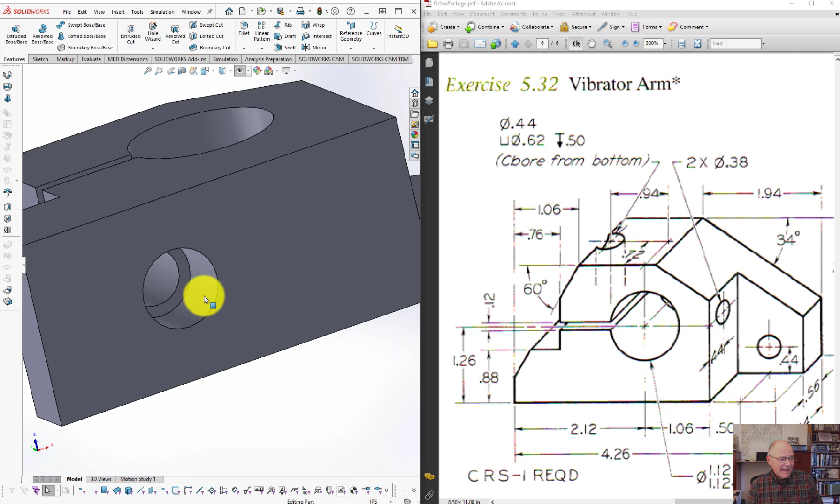Counterbore is a pocket. The depth of the pocket's the distance from that surface to this surface. That's 0.5 inches because it tells me that right there with that depth symbol. The diameter of that hole is 0.62. The diameter of that hole is 0.44. Now that's what it looks like isometrically.

That hole, the big hole, goes all the way through. You can see that. That slit goes all the way through. Something's going to be bolted on here and that'll be clamped to something. Otherwise it's a fairly straightforward shape. I'll just rotate it around so you can see it from all sides. I'm purposely not rotating it into the traditional orthographic position because I want you to do that yourself.

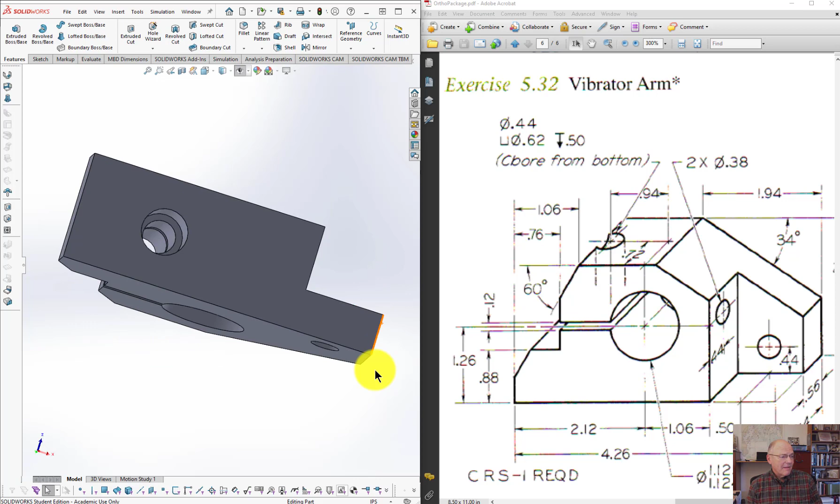But there's what it looks like from the bottom. Looks like from the other side. You can see that hole going down through. And then the counterbore on the bottom. That's what it looks like. A couple other things here. On places where you have 2 numbers, right here you have 1.125, 1.124.

That's a specific tolerance, and tolerance means the size of that hole must fall between those 2 numbers in order for this part to work. You can tolerate that much variation without changing the function of the part. The other dimensions have 2 decimal places, and their precision would be placed in the title block, and it would be based on how many decimal places they have in the United States. That's not something that can be used in other countries.

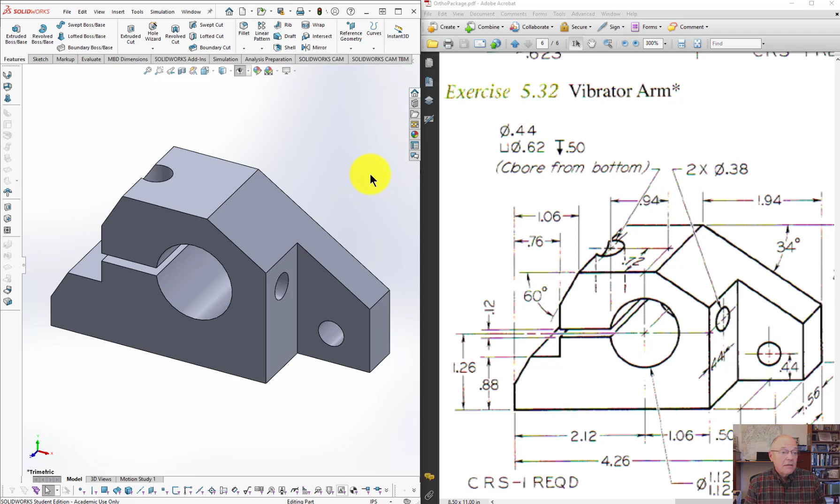The ASME standard permits tolerance information to be carried by the precision of the dimensions placed. Metric drawings in the ISO, the International Standards Organization, do not. So that's this one. Now let's look at the hinge block. A hinge block has a number of dimensions as well that are tolerance dimensions.

There's also another counterbore here, 10 millimeter hole. Counterbore is 14 millimeters. There should be a diameter symbol here. I took these from one of the Giesecke textbooks, and these were edited after the fact. Mr. Giesecke drew most of these probably close to 80 years ago. At any rate, someone just left out the diameter symbol that would normally go right there.

You have a few other abbreviations. Cold rolled steel is what CRS stands for. And then you don't really need to worry about this for the drawing itself. You're going to draw this with multiple views and then put the dimensions on it. And when you do sketch this, you can just sketch it because you're going to be doing this as sketching. Just sketch those sizes somewhere close to whatever that tolerance dimension is.

If you're using AutoCAD, and some of you might be using AutoCAD, then you're going to do what's called max material condition. In a situation like this where you're creating a void, you're going to take the smaller of the 2 numbers. Down here where there's a hole also creates a void, smaller of the 2 numbers. Any place that actually has material associated with it, and there are no dimensions like that here. So in each of these cases you'd use the smaller of the 2 numbers.

I also want to point out that in SolidWorks, any place where there's a tangent edge, where that surface meets this surface through a tangency, because it's a computer and it sees that as a surface and that as a surface, it always puts a line between them. But in fact, with the eye, we would not see that line. It would look more like this.

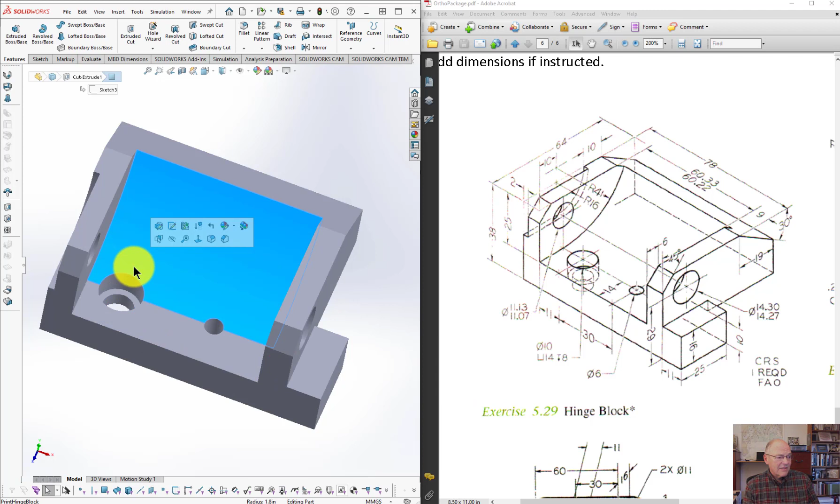That surface right here would be the smaller 10, and the depth from that surface to this surface, well, probably makes more sense to call it from that surface to this surface, because it would have to go from that flat surface. That depth is going to be 8, and the depth in this case is given as a minimal depth. So the fact that it's deeper over here because that arc starts to go up doesn't matter. You're still going to measure it from that end right there.

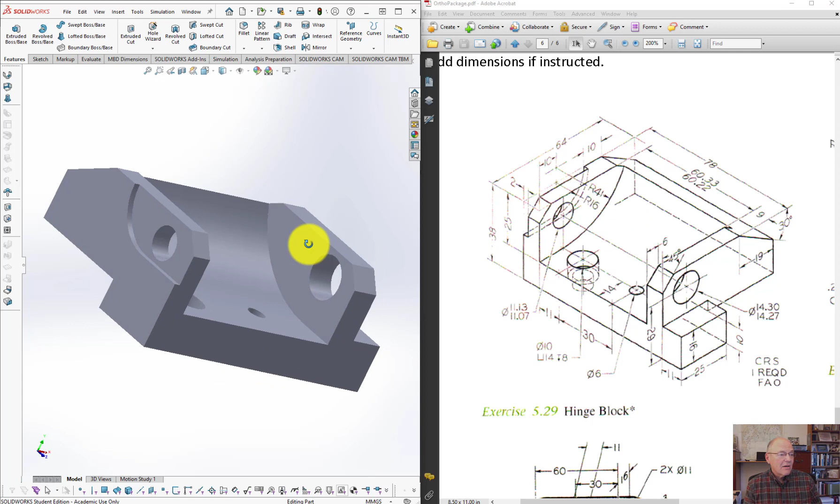The bottom shows you the holes go all the way through. Got a couple holes in the side as well. Now that little cutout is represented over here with that hidden line. That little cutout is just a relief. I'm not sure exactly what it would be for on this particular part, but it's there, and the radius of that is given right there as a radius of 16. The radius of the big arc is a radius of 41. That's the radius of this right there.

Now I'm going to go back to showing the edges, just a little easier to see what we're talking about here. So I'm going to rotate this around like I did the other one, so that you can see what it looks like, and of course you can stop this video and go back and forth. The reason I'm doing this is I want you to be able to visualize this and then determine how to best represent it orthographically by doing the sketching.

Go this way, and it looks like that. Isometrically, looks like that. More or less like this. These are both isometric drawings. It's not exactly the same angle on this, but you can see how it's portrayed. A little difficult in isometric drawing sometimes to understand what's going on.

For instance, right here there's a hole. It doesn't tell you it goes through the part directly, but it does go through the part, and the way it does tell you that is by not giving it depth down here. So that diameter of 6, when applied to a hole, indicates that it goes all the way through the part, because if it didn't, you'd have to indicate a depth. Counterbore we just looked at. Everything else I think is pretty clear. We're going to move on to the next one.

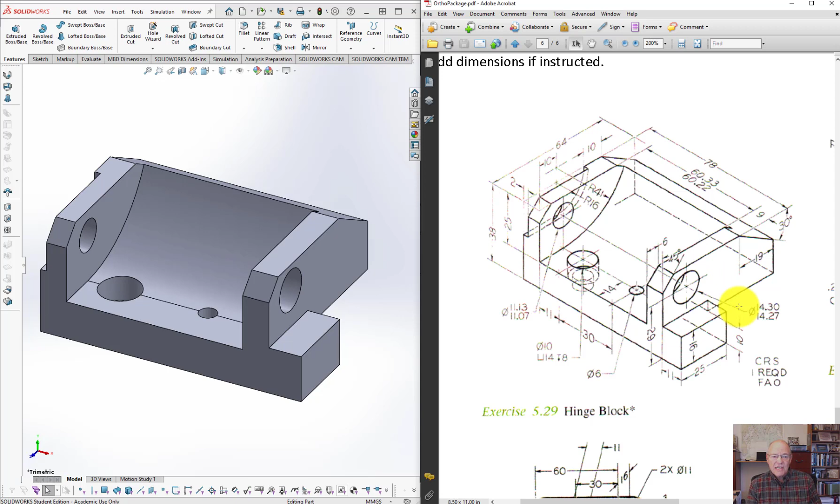And before we go on to the next one, I did not tell you what FAO stands for, and that's something you don't see on prints very often anymore. It stands for Finish All Over, and it implies that it might be possible to think you didn't have to machine this to make everything smooth, when in fact it has to all be machined. So that either was a forging or a casting, probably a forging, that must now be machined in order to achieve the dimensions given. Now we'll change to the next one.

The next piece we're going to look at is called a vibrator arm. You can see that it was drawn isometrically a little differently than this one. We could kind of put it in that position if we wanted to. This has another feature that we haven't seen yet, which is a chamfer, although it doesn't have the whole word here, C-H-A-M-F-E-R. The chamfer is going to be a dimension by an angle.

And if we take a look at this model over here, the dimension given is the distance from this face down to that edge right there. So that distance would be like we're drawing a right triangle in here. We draw the right triangle, the distance from here is going to be 0.25, and the distance from here back is going to be 0.25. And that means I'm drawing this on the surface, but the fact is that's the part that gets taken away.

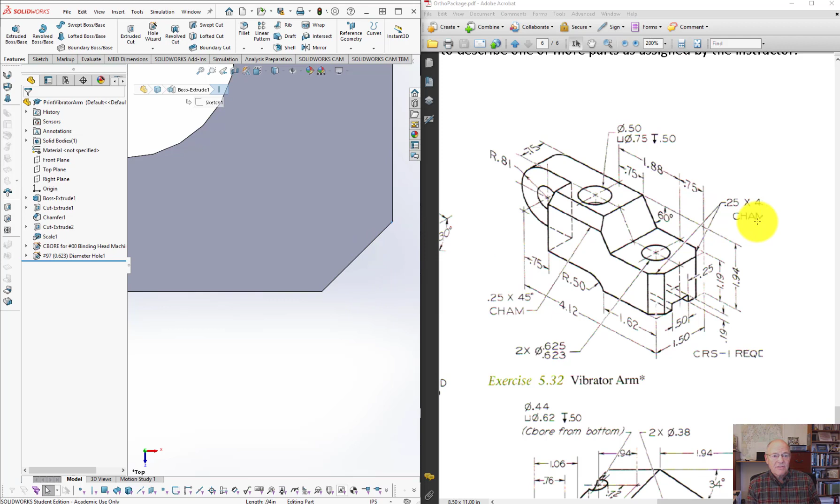So if we look at it from the top, what it's saying is the distance from here straight across to line up with that is 0.25, and the distance from that point right there, so it lines up with this, is also 0.25, and that angle is 45 degrees. That's the part that gets cut off a little bit. That's a very common way to dimension a chamfer, because a 45-degree chamfer has legs that are the same length on either side.

Otherwise, you've got another counterbore here. That counterbore is here, with a little pocket in the top. It goes down a certain depth, half an inch in this case, 750 thou. By the way, that's how machinists would identify a dimension like this. In a machine shop, the unit of measurement used in the imperial system, in the U.S. system, is a thousandth of an inch. In metric shops, it would be a hundredth of a millimeter.

So that would be called 750 thou by a lot of machinists, and that means 750 thousandths of an inch. You wouldn't call it 75 hundredths, and you wouldn't call it 50 hundredths. It'd be 500 thou and 750 thou.

So we'll take a look. This is fairly straightforward. I think there is a slot on the bottom that you see right there. They only show you the hidden lines part way, just to simplify the isometric drawing, but it does in fact go all the way through. So let's rotate that around for you.

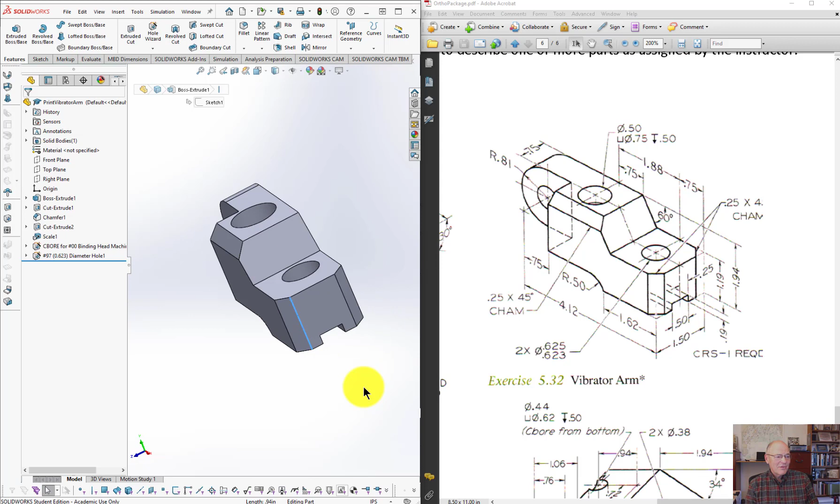And again, I'm purposely doing this so it doesn't give you the standard orthographic views, because I want you to think of what those would be and then identify them in your mind's eye. And once again, the software is showing us these tangent edges. You would not see those with the naked eye, so your drawing would be of a part that looks like that.

Nothing else. CHAM, again, is an abbreviation for chamfer. You don't need to put that in. When you identify a feature like that by pointing at it and giving a dimension, in this case there's spaces on either side of the X, but when you give a dimension 0.25 space X space 45 degrees, that is a chamfer. There's no reason to identify it in addition with a term.

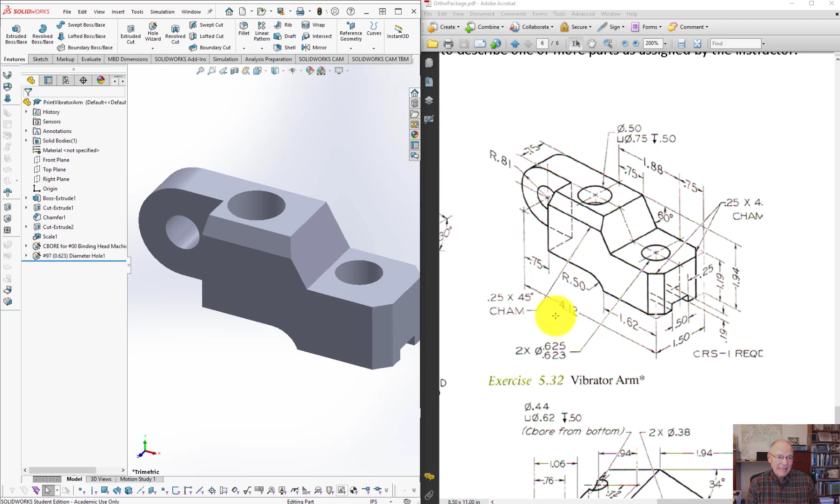All right, I have another one. This is called a counter-bearing bracket. Bracket would hold something, and something would be bearing, and there'd probably be a shaft in it. It might have a sleeve or a plain bearing or a bushing of some kind. This is what it looks like over here, although because there are so many tangencies, there's a lot of lines here that would not show up in the drawing. So in fact the part looks like this.

Now this introduces a couple of other mechanical elements, and that is what are called fillets and rounds. And you indicate the size of fillets and rounds, if they're all the same, and they normally are in a cast part, as a radius of 3. This is all metric, of course. Rounds are any edge on the outside. There's a round right there, because it's an arc that's tangent to two surfaces on the outside. Down here we have a fillet. A fillet is the same thing geometrically, but it's on the inside. When you have a fillet or a round, it's always tangent to the surfaces that it connects.

And the purpose of that, and when I said this is a cast part, you can tell it's a cast part because of this little poching, which are little speckles that are there. That was the way when we drew by hand and drew isometric drawings. That's the way we used to indicate that something had a rough surface from being cast. Cast parts are normally cast iron, which is what this is. That's what CI stands for. And cast iron is normally cast in molds that are made out of sand. Because of that, the sand imparts a texture to the surface. It also has a certain hardness at the surface because it cools so fast there.

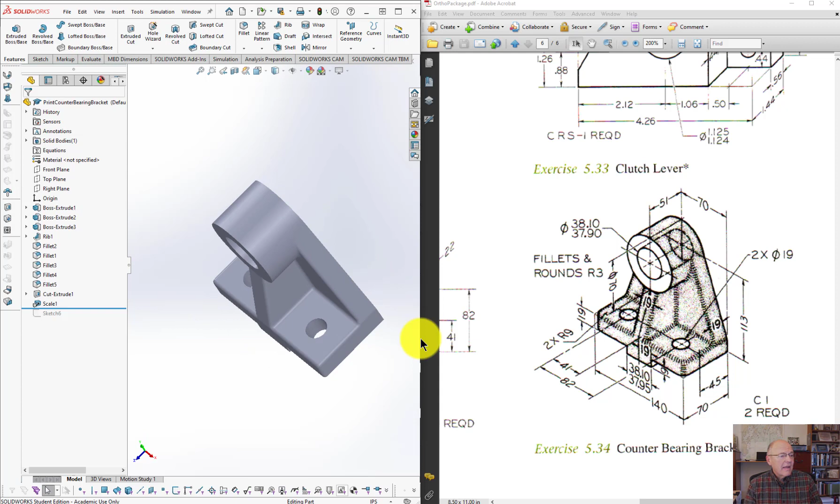So from a point of view of making a usable part, you might start with a cast part, but then the key features have to be machined. In other words, somebody had to cut away that face, bore that hole out, and the back had to be machined as well. That's what gives it that square edge. And I don't know that I knew that for sure, but just looking at it, it appears to be that the back would be machined as well.

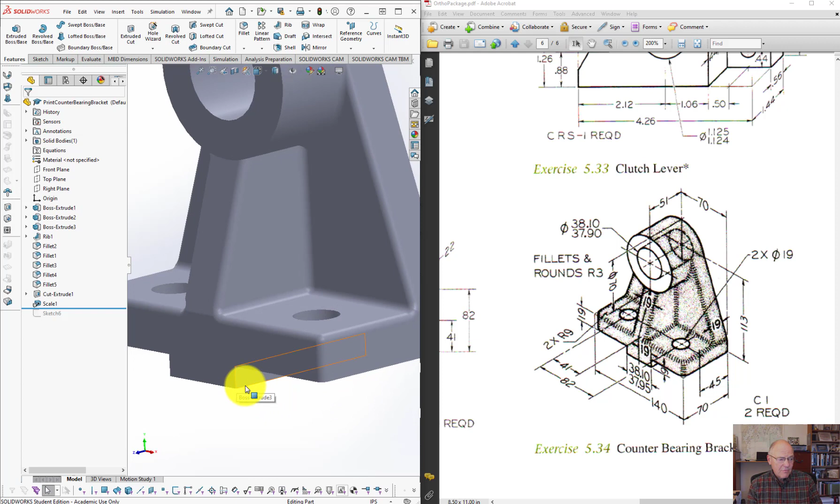The bottom has to be machined because the bottom has a piece that's going to slide down into a slot. So this is all flat, that's all flat. And what that means is you're going to have corners instead of surfaces that are curved. So these bottom edges are sharp corners, sharp corner, sharp corner. Whereas the places representing surfaces that are still in their cast form still have the fillets and rounds, so they've got the smooth transition. Unusual to have a hole just drilled down through like that without having a spot face around it, but that's how this is drawn, so that's how I want you to go ahead and create it.

That's called a rib, and that rib is in there just to give it additional support. And that's probably all you need to know about this part. There are, again, 2X, no space, looks a little like a space, but 2X with no space, then a space. The diameter means that both of those holes are the same size.

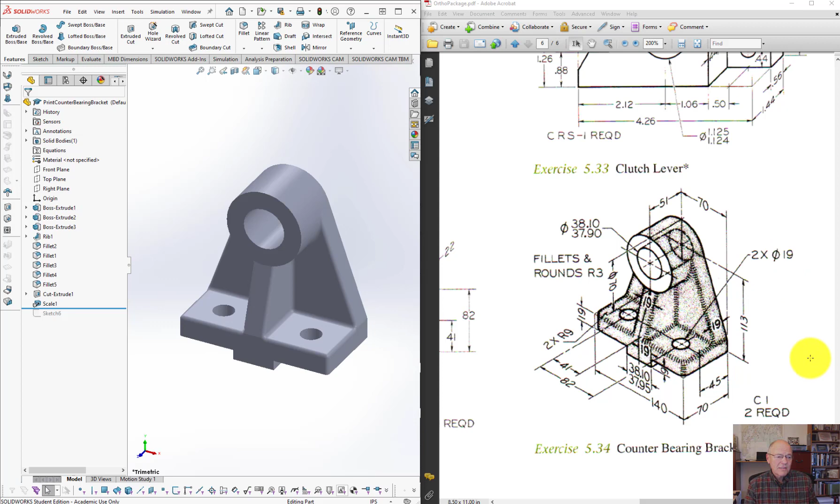Now we have the feed rod bearing, or as a student once described it, the monkey face part with the googly eyes. This part's similar as far as the shape goes. A lot of tangencies, one up here, there's one over here, right there. There's also smooth fillets and rounds, and those all have a radius of 3 as well.

When you're sketching this, by the way, the sketch paper that I gave you has blocks laid out for inches, but they're decimal inches, so there's 5 little blocks per inch, which means you can use this as a way of sketching with metric if each one of those little blocks, which is 0.2 inches, is sketched as 5 millimeters.

Nothing different about this in particular. Again, parts of these, this is a raised boss. That right there. That raised boss has got a purpose, and that's what I was saying I thought was missing from the other one, or a spot face. The purpose of that is to strengthen the part right there, because cast iron is very brittle.

And when you bolt cast iron down by putting bolts down through it and then tightening it down, which is what you would do here, it's helpful to have a little bit of a thicker place where the bolt is actually putting its pressure. You also need to have a flat surface, because if you bolt something that's cast iron with that rough surface, all those little teeny bumps tend to concentrate stress, and the stress concentration has a tendency to crack the cast iron.

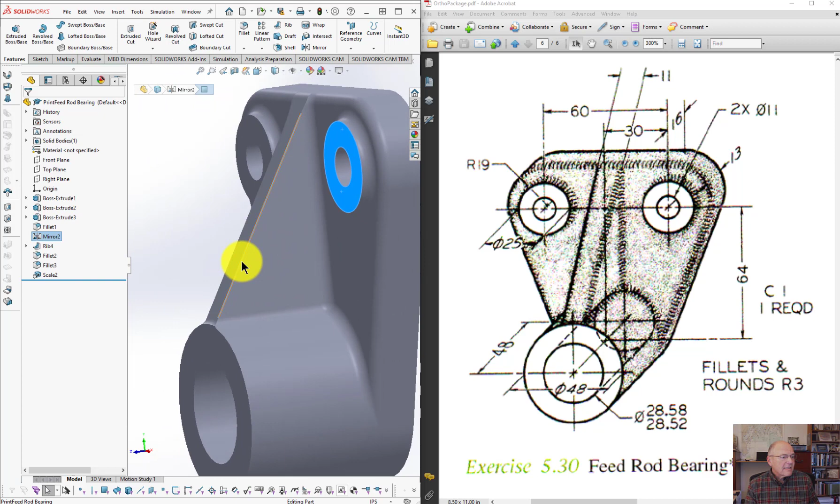And did I? Yeah. Let's say it looks like that's an edge right there. You know what? I never put a fillet on that edge. I'm going to do that right now. And whoop, I don't want it to be quite that big, that's for sure. Well, let me do it a little differently. This is SolidWorks. This has nothing to do, folks, with what you're doing with your sketching. I just want to go and add in that fillet right there. Oh, I see how I didn't put it in. It didn't like it. All right.

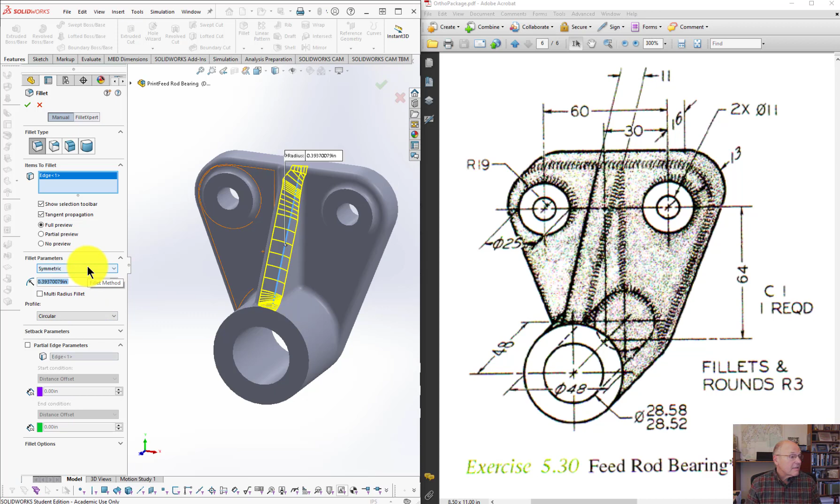Well, you don't need to see this whole thing. I am going to fillet it, though. And I'm going to do that individually by saying put a fillet on that edge right there and give it a size of, is this in inches? No, 3 millimeters. Alright. So that's what it would look like. It would be filleted on all sides. Now we'll take a look at the next one.

So now we're at the last one, which is something they're calling a lever hub. This is also done in metric, obviously. There's nothing about this that we haven't already looked at. So I'm just going to let you go ahead and draw it. I will let you see what it looks like over here. The thing that's unusual about this is that I would have expected this to be a cast part, given its shape, and I would have expected radiuses here representing those fillets. But draw it the way it's shown there.

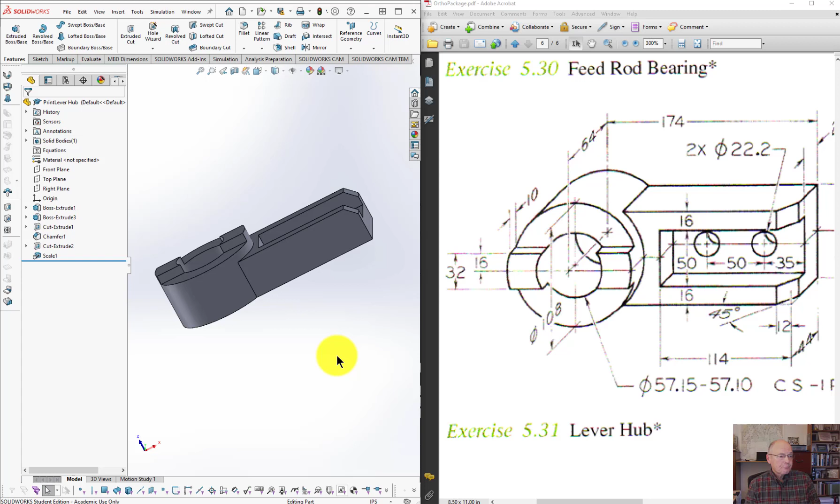So what this is going to look like is this. The bottom is flat. A couple holes go through. You got the corner cut off right there. That's a chamfer. Someplace it should tell you what that chamfer is. What it does here is, instead of calling it out as a chamfer, it just gives you the angle of 45 and the distance back of 12. And that's all you're going to have to do there is draw that in such a way that it goes back 12 millimeters or so. It's a sketch, so you're just coming close.

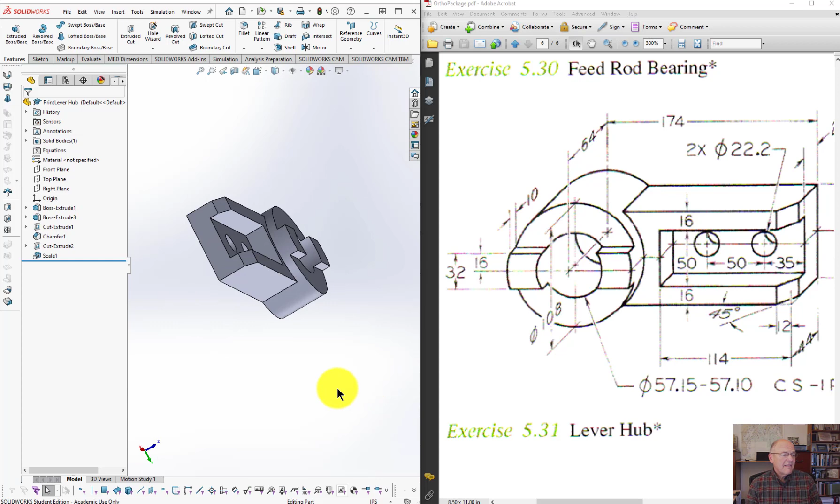Just make sure that everything you do is orthographically correct, your line weights are correct, your line types are correct, and that you leave enough space between all the views so you can put the dimensions in later on. Yeah, so that's what it looks like moving it around like that. That's what it looks like moving it around like this. I think that's probably enough. Looks like that. I can't remember if I actually turned around the last one we did or not. Let me go pause this for a moment, bring it back, and then do that in case I did not show it to you.

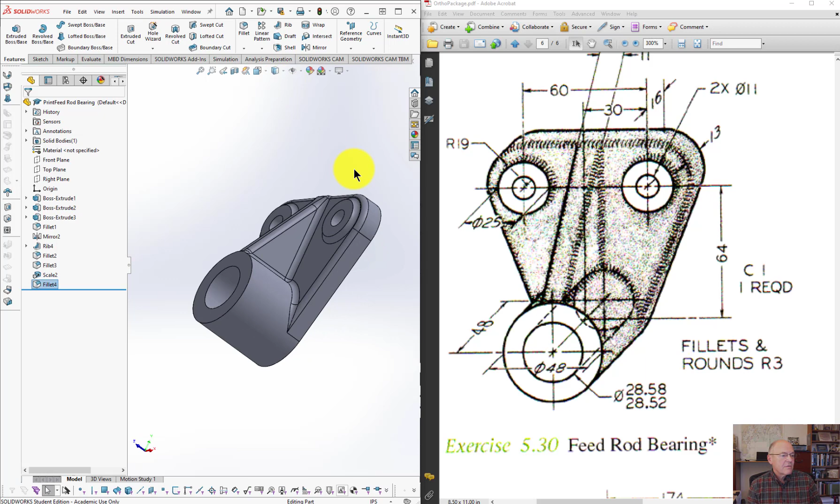Yeah, I am back. I don't think I did, so let's just see what that looks like. Flat on the back, holes go straight through. The only variation from straight holes is those raised bosses right there. Put the edges back in just so you can see a little better. Then everything is rounded where all the intersections take place. Looks like this. And it looks like that. Alright. That's enough for this.

I just want to make sure you have something you can refer to while you're doing those orthographic sketches. These, you're going to be very careful on these, take into account all the comments that I made on your last assignment. Make sure that you line things up. Make sure that you understand the fundamentals of orthographic projection. Make sure that any feature that shows up in one view is projected correctly to another view.

Use a miter line if you think it would be helpful to go from the right side view to the top view. Use third angle projection, not first angle projection. Do not label the views. People know what a front view is, they know what a right side view is, they know what a top view is. I think that's enough.